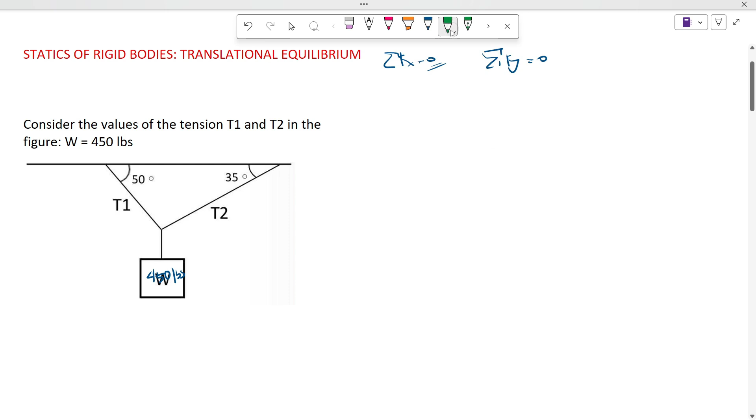So an example guys, consider the values of the tension T1 and T2 in the figure. 450 pounds is the weight. Since sa pag-solve ng equilibrium guys, dapat marunong tayong mag-drawing ng free body diagram. Paano ba gawin yung free body diagram? Ganito. Kukunin mo yung center niya. Gagawa ka lang ng Cartesian plane. Yan guys. So, gawa tayo dito.

X and Y. Since ito ay 35 degrees, this is also 35 degrees from alternate interior angle. Gets guys? Tapos yung tali sa kabila, eto yung T1. Eto yung T2. So, with the angles of 35 and 50 degrees. Then, sa paglagay ng arrow, ganito yan guys.

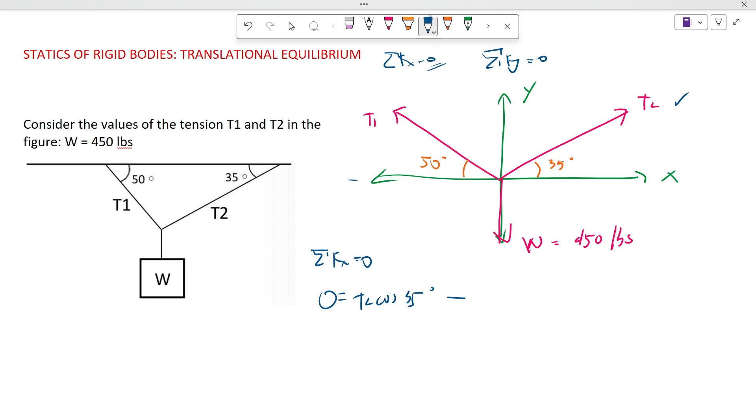Next is summation of forces along x. 0 is equal to T2 cosine of 35 degrees. Dito negative, since quadrant 2 sa x-axis. So, negative T1 cosine of 50 degrees. Yung T1 lipat natin sa kabila, equals T2 cosine of 35 degrees. Divide both sides by cosine of 50 para makuha yung variable T1. T1 is equal to T2 cosine of 35 over cosine of 50.

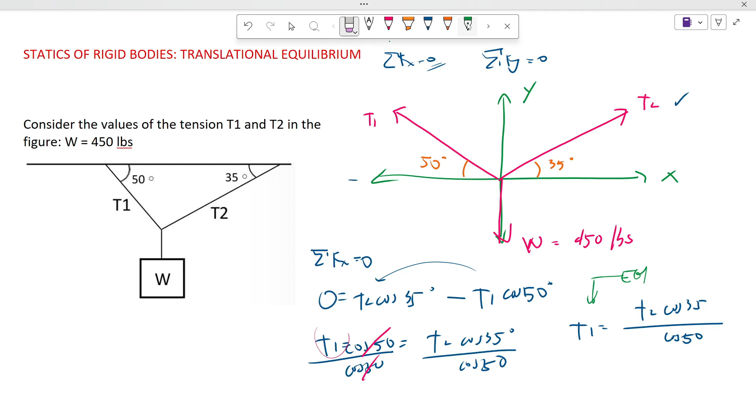This will be equation number 1. Anong hinahanap? T1 and T2. Since dalawa yung pinapahanap, 2 unknowns, 2 equations. Meron na tayong isa. Hanap tayo ng isa pang equation by summation of forces along the y-axis. Kanina x, ngayon y-axis na tayo.

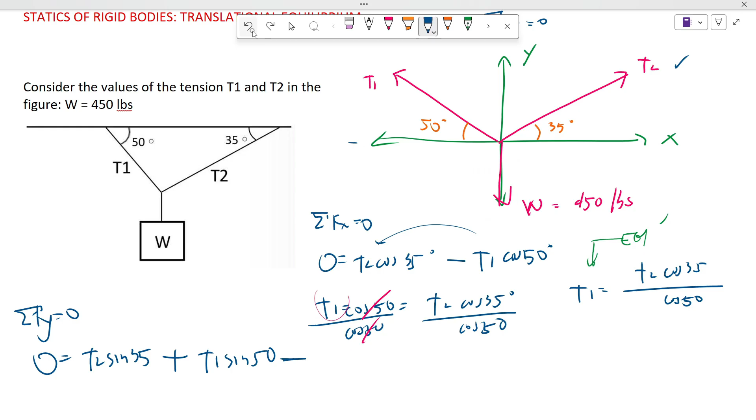0 is equal to T2 sine of 35 degrees plus T1 sine of 50 degrees. Bakit positive? Kasi positive y-axis. Minus weight, 450 pounds, since negative y-axis. Next, yung 450 pounds lipat natin sa kabila. Kinokopya ko lang, guys.

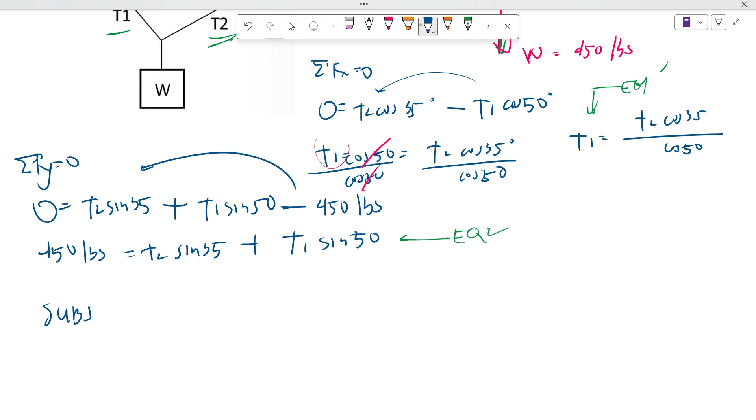Next, i-substitute natin yung value ng T1 sa equation number 2. 2 unknowns, 2 equations. May equation 1 na tayo, may equation 2, so makakasolve na tayo ng isang variable. Itong T1 substitute mo lang sa loob. Substitute equation 1 in equation 2. So copy muna natin yung equation 2.

T2 cosine 35, yan na, yung T1. Lalagay natin yung value na to. T2 cosine of 35 all over cosine of 50. Tapos, sine of 50. Saan galing sine 50? Ito yun. Nilagay ko lang yung T1. Gets? Goods. So, this value, sine 50 all over cosine 50 is equals to tangent 50.

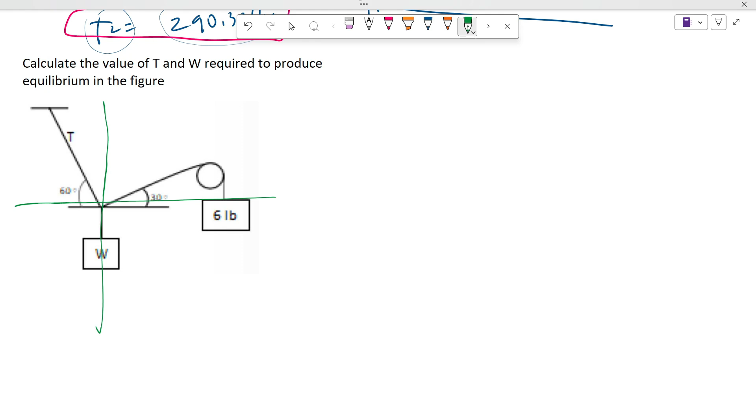Example problem. Calculate the value of T. So, this will be our T. Calculate the value of T and W required to produce the equilibrium. Anong gagawin? Free body diagram. Kunin mo yung center. Kung nasaan palagi yung weight, doon madalas yun. So, free body diagram.

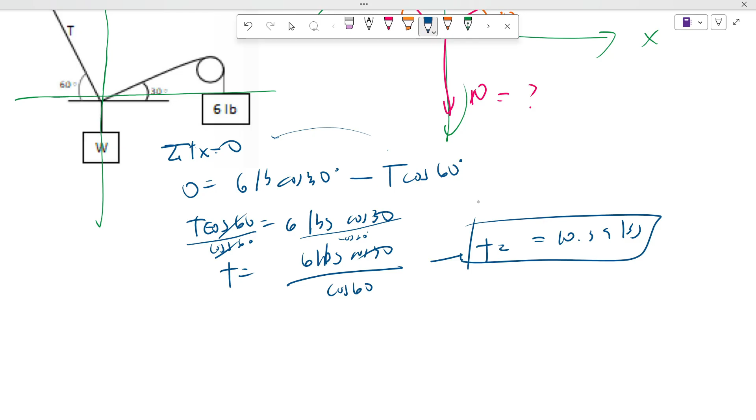So, 6 cosine of 30 divided by cosine of 60. Ilan? 10.39 pounds. Walang T2, sorry. T is equals to 10.39 pounds. So, next, the W.

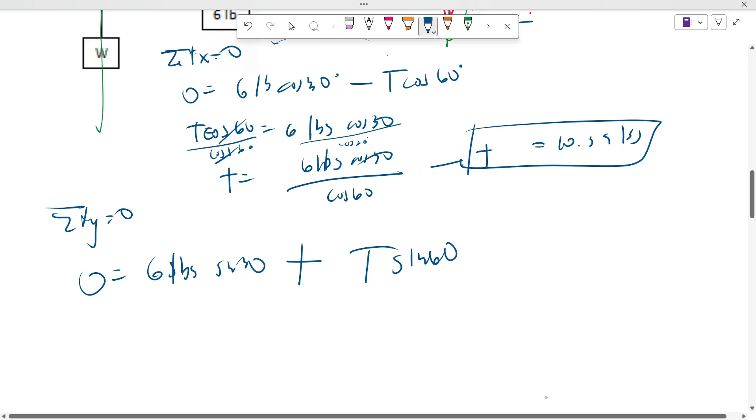How to get W, guys? Summation of forces along Y-axis since the weight is nasa Y-axis. Summation of forces along Y is equals to 0. 6 pounds sine of 30, positive yun, plus T sine of 60, minus W. Bakit minus? Since yung W is nasa negative Y-axis.

Yung W lipat sa kabila. W equals 6 pounds sine of 30 plus T sine of 60, in which T has a value of 10.39 pounds. So, palitan natin yung T ng 10.39 pounds.

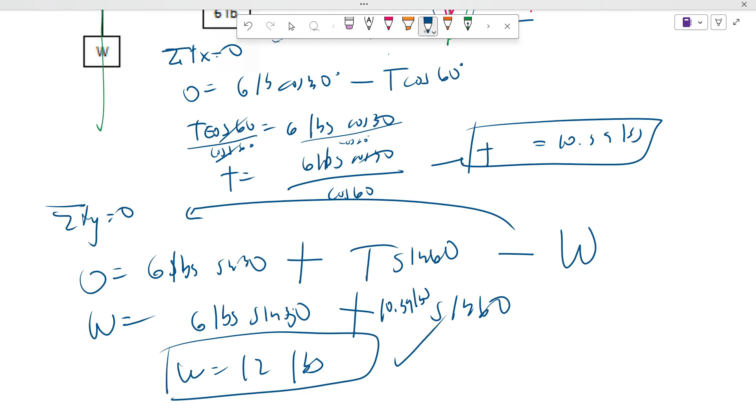So, yan, equate nyo na 6 pounds times sine 30 plus 10.39 sine of 60. So, the answer will be 12 pounds. Gets? So, eto yun na. Eto na yun. Weight and T. So, basahin natin ulit yung problem. Calculate the value of P and W. So, nakuha na natin. O, next.

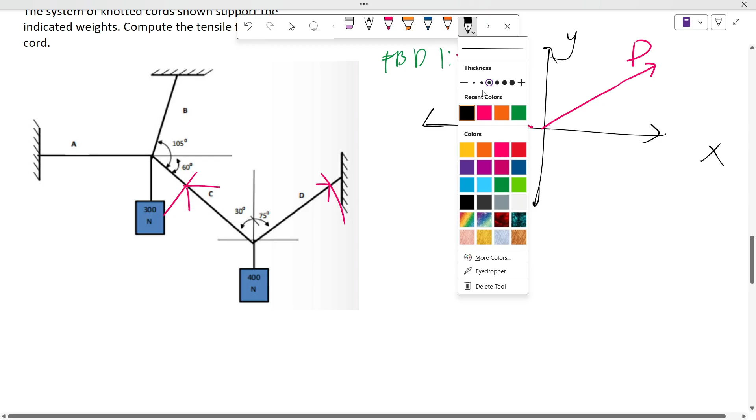Sana. Ito, orange. So, ito ay 30 degrees. So, anong angle nito? 60, siyempre. Bakit 60? So, quadrant. 1 quadrant is equals to 90 degrees. Diba, guys? 90 degrees. So, if 90 ito, so meron na siyang 30. 90 minus 30 is 60, diba? So, 60 degrees ito. Tapos, yung angle na nandito is 30 degrees. Gets? So, huwag na natin lagay. So, next is 75. Kaso, ano yun nandito? 15 na lang yun.

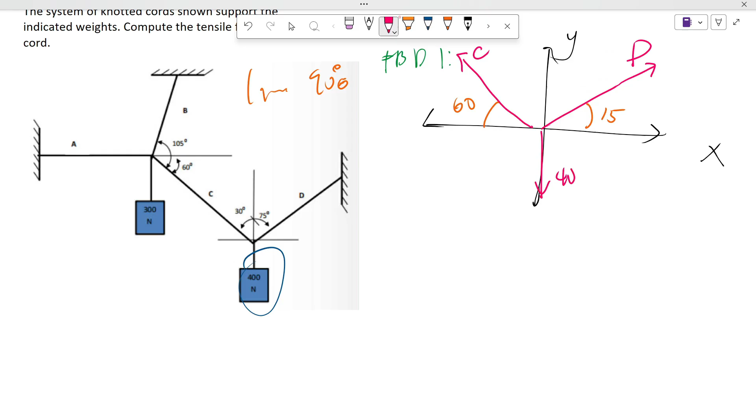So, ang isang quadrant ay may katumbas na 90 degrees. Gets? So, letter C. C. Oh, gets. Oh, next, with the weight of 400 Newton. The 400 Newton is downward. Oops, nakalimutan natin basahin yung problem. Compute the tensile force in each cord. So, the cord D, cord C, cord B, and cord A yung pinapahanap.

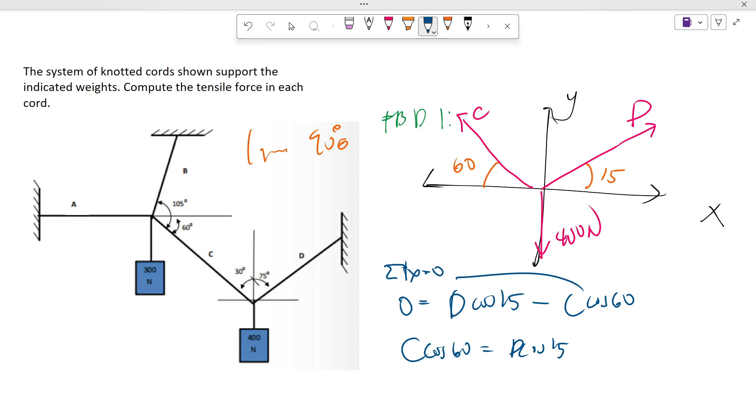So, game. Summation of forces at x equals to 0. 0 is equals to D cosine of 15 degrees minus C cosine of 60 degrees. Yan na yun. So, lipat natin yung C sa kabila. C cosine of 60 equals D cosine of 15. Nilipat ko lang guys. Wag nyo kakalimutan yung mga basics sa algebra, kasi napaka-importante nun. Cosine of 60, cancel na to. C equals D cosine of 15 all over cosine of 60. Ito yung equation number 1.

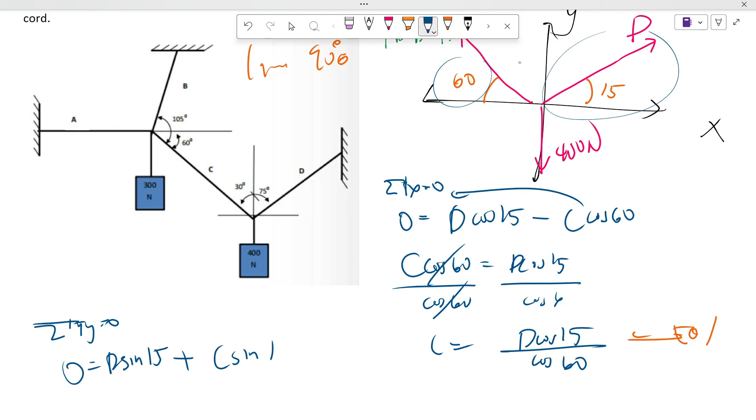So, to get equation number 2, proceed tayo sa summation of forces along y is equals to 0. 0 is equals to D sine of 15 plus C sine of 60 minus 400 Newton. So, yung 400 lipat na natin sa kabila: 400 Newton equals D sine of 15 plus C sine of 60. Gets?

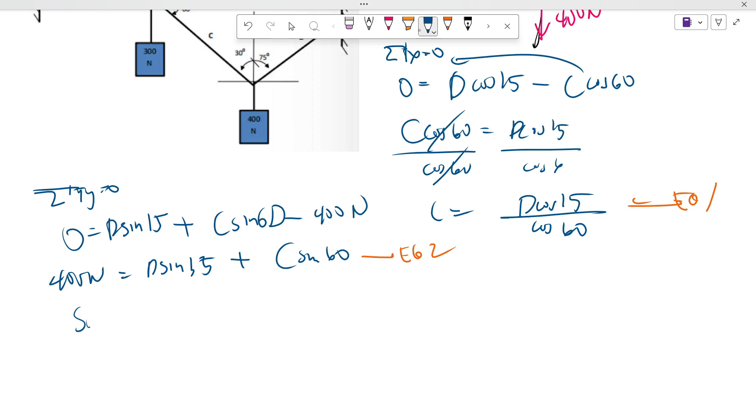So, label natin para hindi kayo malito. Equation number 2. So, yung equation number 1, pwede natin itong i-substitute sa equation number 2. Subs equation 1 in equation 2. So, yung C na to, ilalagay nating value is ito. 400 Newton equals D sine of 15 plus D cosine of 15 over cosine of 60 times sine of 60. Note that sine 60 over cosine 60 is equals to tangent 60.

Paltan ko na. And the sine of 15 using your calculator in degree mode, ano yung katumbas niyan? Yung 0.26. Kinalkyo ko muna, guys. So, D cosine of 15 times tangent of 60 is anong katumbas niyan? 1.67, di ba? O, goods na. Combine like terms since same sila ng variable. So, 1.93 D.

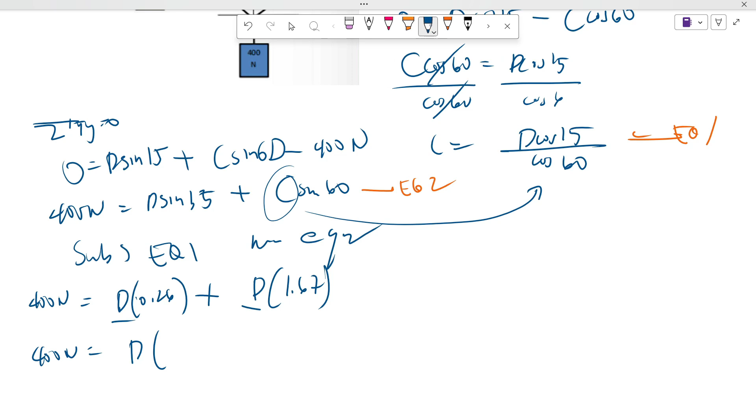To get the value of D, divide both sides by 1.93. Cancel. D is equals to 400 divided by 1.93 is equals to 207.25 Newton, guys. Gets? So, eto na yung cord D. Cord D pa lang yan.

To get the cord C, note that the C, eto yun. Gets? So, substitute mo lang yung D dito para makakuha ng cord C. Sulat natin. Sub D in equation number 1. C is equals to 207.25 cosine of 15 all over cosine of 60.

Ito yun, guys, baka malito kayo. C is 207.25 times cosine of 15 divided by cosine of 60. Ilan to? 400.38 Newton, guys. So, ito yung cord C.

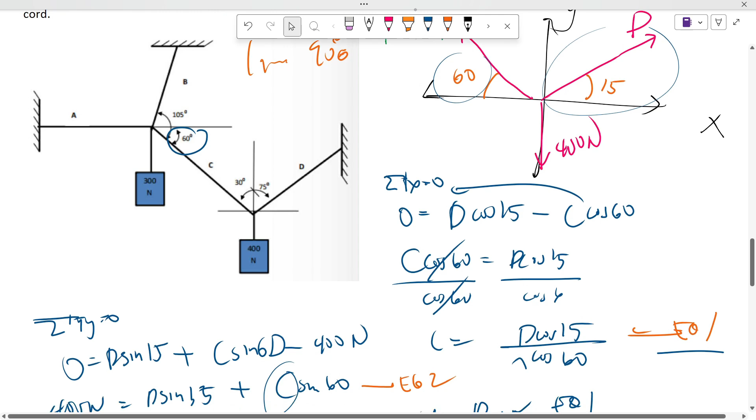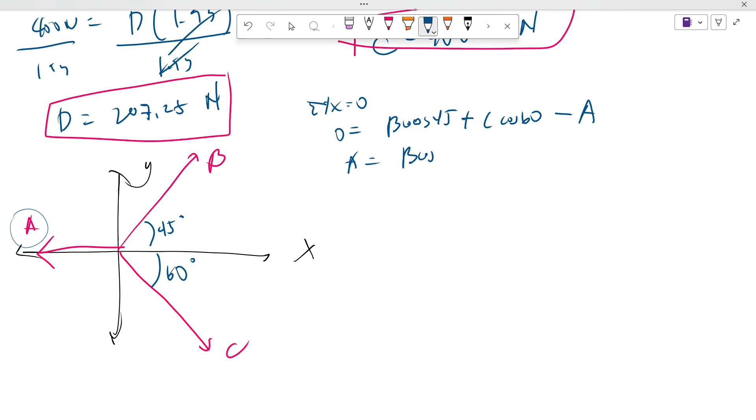Goods, goods. So, to find the forces in cord A and B is what? Summation of forces along x equals 0: 0 = B cos 45 + C cos 60 − A. Since A is nasa negative x-axis, yung A lipat sa kabila: A = B cos 45 + C cos 60, in which yung A natin has no value pa. Since B is unknown, A is unknown, C is given, which is C na-compute na natin kanina, 400.38, pero 2 unknown pa rin, which is A and B. So, kailangan pa natin ng isang equation. So, this will be equation number 1.

And summation of forces along y is equal to 0. 0 is equal to what? So, B sin 45 minus C sin 60. Goods. So, lipat sa kabila yung C sin 60: B sin 45 = C sin 60. So, divide both sides by sin 60. Wag kalimutan yung cancel. So, in which C, diba? Tama, C. Pero equate na lang natin siya sa B, since yung C is given naman pala. Pwede din naman yun, pero mas maganda yung B na lang yung equate natin.

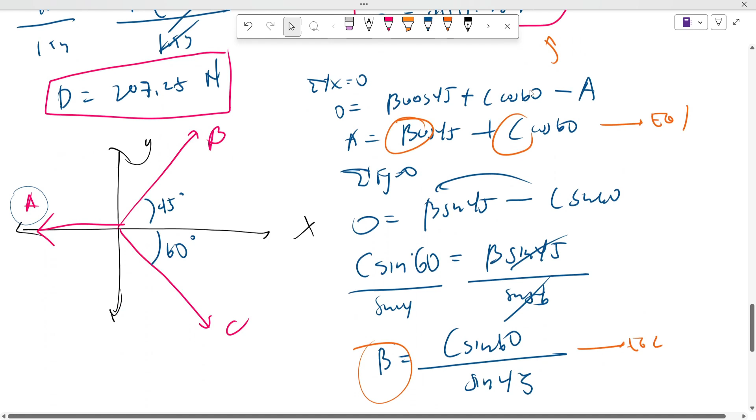C sin 60 is equal to B sin 45. Divide both sides by sin 45, cancel, cancel. B is equal to C sin 60 all over sin 45 degrees. So, yung B, equation number 2, in which B is substitute lang natin siya dito, and the value of C, yung kanina, substitute lang natin. So, nakasulat is sub equation 2 and C in equation number 1.

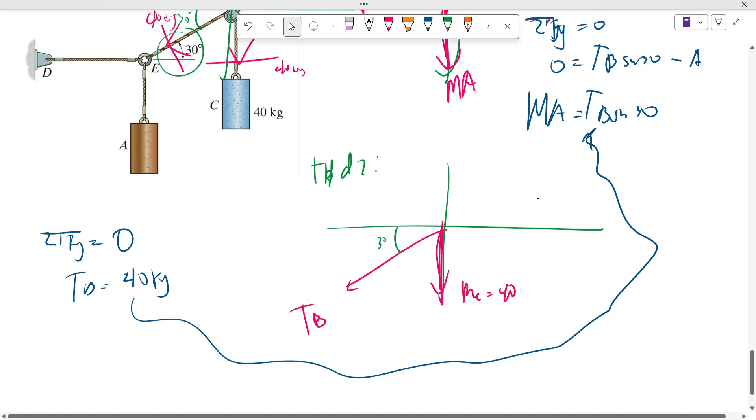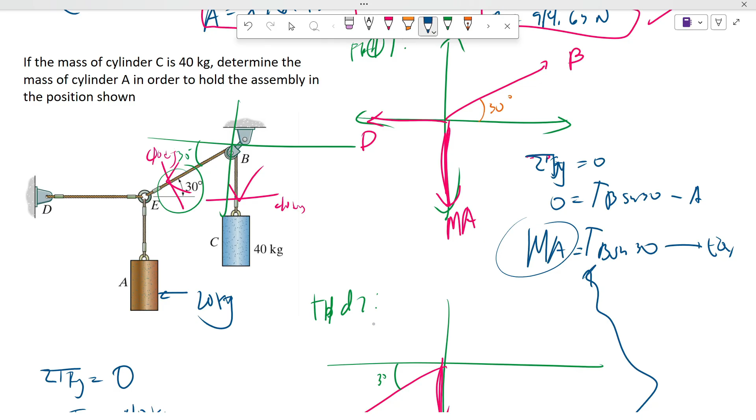These 40 kilograms, guys, substitute at equation number 1 to get mass at A. 40 kilograms sine of 30, mass at A is equals to 20 kilograms. So this will be our final answer for this problem, guys. Sinubstitute ko lang. So the cylinder A has a mass of 20 kilograms. Ganun siya guys. Tandaan, pag pulley equal yung forces guys. Gets? So, I hope na gets guys.